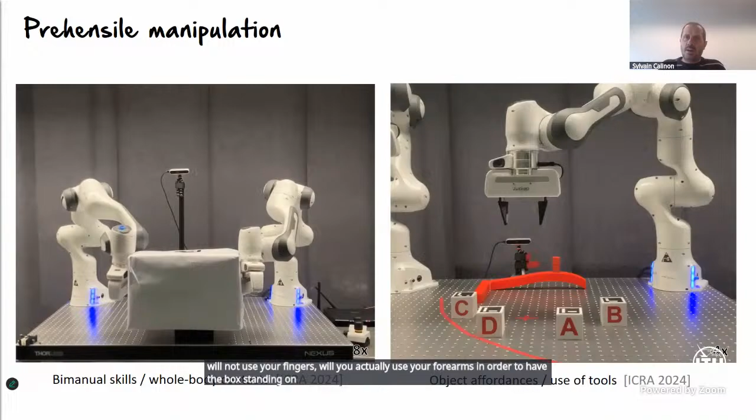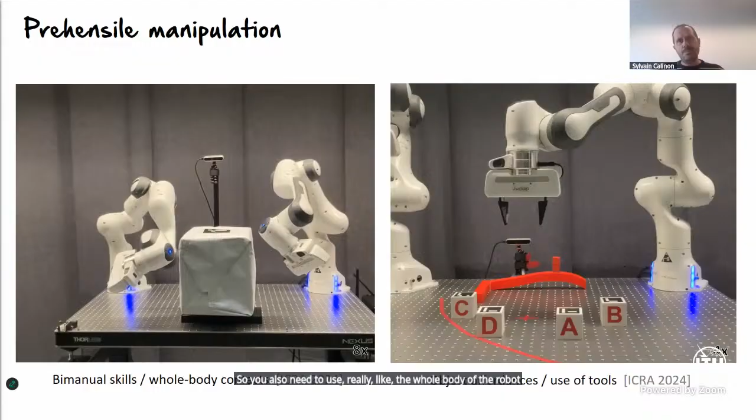It's very important for humanoid robots because you cannot put very complicated hands on them, they would be too heavy. So you also need to use the whole body of the robot if you want to provide manipulation capability to these new humanoid platforms.

So here we are studying this with bimanual tasks. We are using robots in our lab that are compliant, torque controlled robots. And here we test different ways of using the whole body as a geometric way of describing what kind of contact point we can use to solve the task.

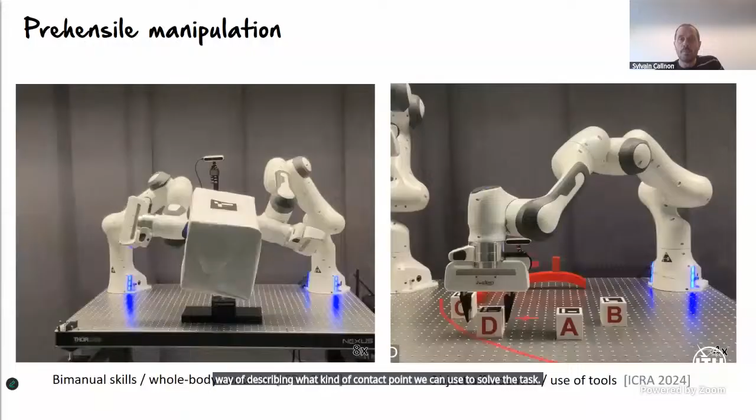Then we also study the problem of using tools. If we don't want to use the gripper, we can still use tools that the robot can grab. And in many applications you have a diversity of tools that you might want to use, and these tools can be used to simplify the work of the robot.

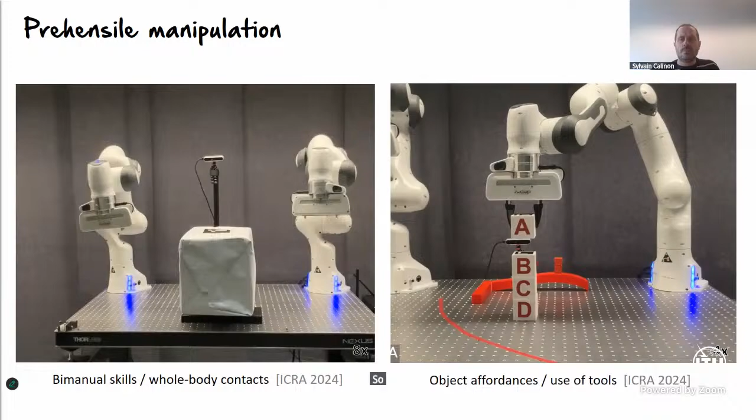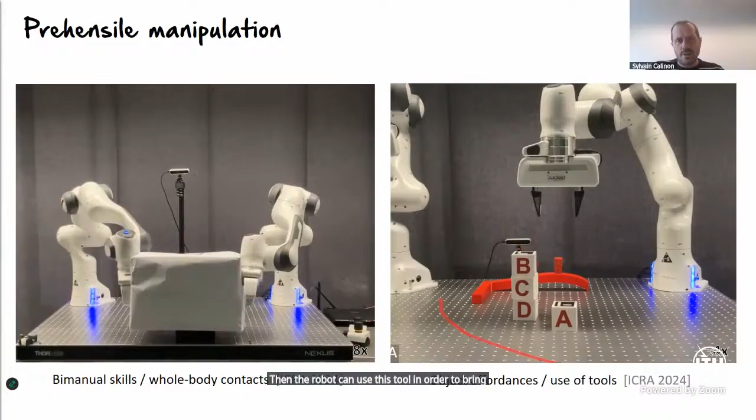So here in this example, I provide some kind of rake that the robot can use. And if the objects are too far away, then the robot can use this tool in order to bring them closer. So that's for prehensile manipulation.

But now we have also a lot of non-prehensile manipulation skills. These are all the skills involving pushing or pulling objects. And here these tasks are important. We do quite a lot of work by pushing and pulling objects on a table, typically.

Like if we have large boxes that we need to align, then it's likely that we will exploit the environment and we will not put the box directly where it needs to be. We will put it first closer to us and then we'll slide it, because it's much easier to do. We don't need to use too much energy to do this. So pushing, pulling is important for that.

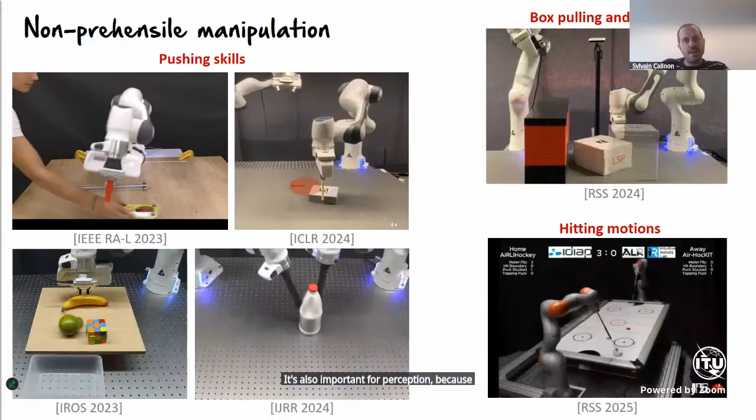It's also important for perception, because you can simplify the scene if you are separating objects that would be stacked somewhere. It's also simplifying the separation of objects in order to grasp them. If they are better separated, we can grasp them in an easier way. And it's also more generically useful to be able to reorient objects.

So if we now think of exploiting the environment, then we can also think of tasks such as pivoting objects using the environment in order to manipulate dexterously these objects.

Another example of non-prehensile manipulation is this Air-HocKIT challenge in which we participated. And here it's involving more hitting movement and also strategies about how to bounce the puck on the wall in order to win the game. So these are examples of non-prehensile manipulation skills.

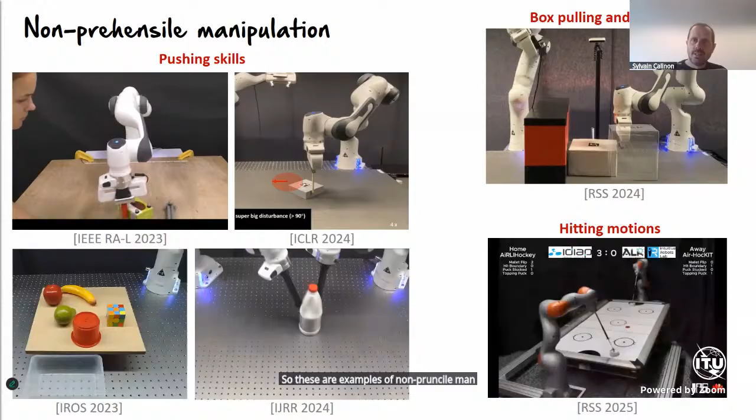Now we are also involved in projects focusing on very precise manipulation, typically with watch manufacturing and these different kinds of industries that require very precise movement to be done. And often we have platforms that are very expensive if we want this precision.

What we demonstrated in this task is that we don't necessarily need to use expensive robots. We can actually use cobots that are less precise and available more easily on the market, and instead use a wise way of correcting for the imprecision that these platforms have.

And this process requires some active perception, so that the system is correcting online by perceiving what are the offsets in what we want to do. It's typically what we do on our own, like if you try to do a task blindly, you might not do it correctly, but if you have the visual feedback, you will correct your movement.

And here we did the same with this platform, and we could demonstrate that with a wise way of sensing the environment, we could achieve this very precise task of using a needle head and a string, and then actually put the string in the needle head. Why? If we look at the data sheet of the robot, we are not supposed to do that, it goes beyond the precision of this robot. But if we have this local correction, we could achieve this.

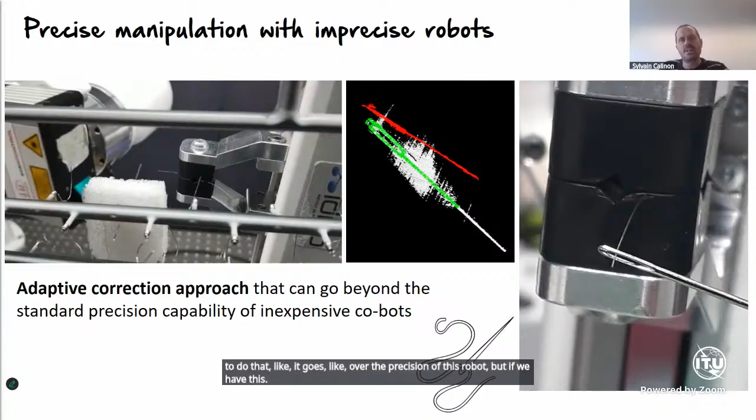Now let me give you a last example to show what we do in our lab. So that's the important point I would like to convey first.

We are also working on teleoperation. And teleoperation is, in my view, human-robot collaboration. We have the robot doing some part of the task, the user doing some other part of the task. So teleoperation is just distinct by the fact that the user is usually away from the robot.

What we did in this project was a large European project, and there was a teleoperation center. The idea was to teleoperate a robot to do some valve turning, very deep in water. We had this slow communication process because we cannot communicate with the robot in the middle of the ocean in an easy way from a teleoperation center.

So here we had to bring some form of intelligent correction for the robot to be able to handle situations locally. In this example, the robot was automatically correcting for perturbations by transferring only the higher level information.

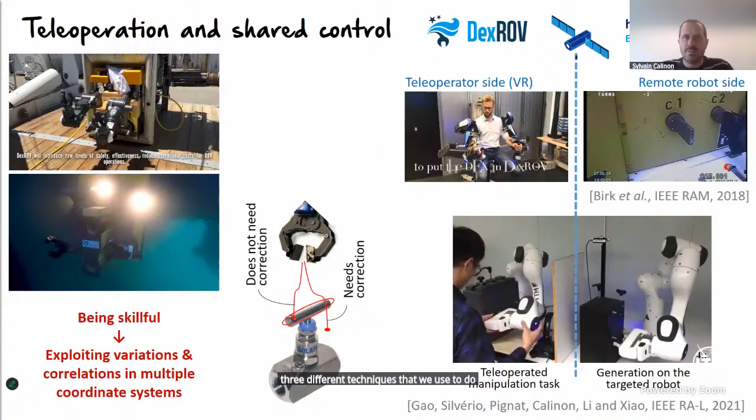Now in the rest of this presentation, I will show you 3 different techniques that we use to do these different kinds of manipulation tasks. It's some kind of highlight to give you ideas about what research components we have behind, and what kind of models we are considering. I will propose 3 different models.

One is called ergodic control. The other one is called tensor networks. And the final one will be related to geometry.

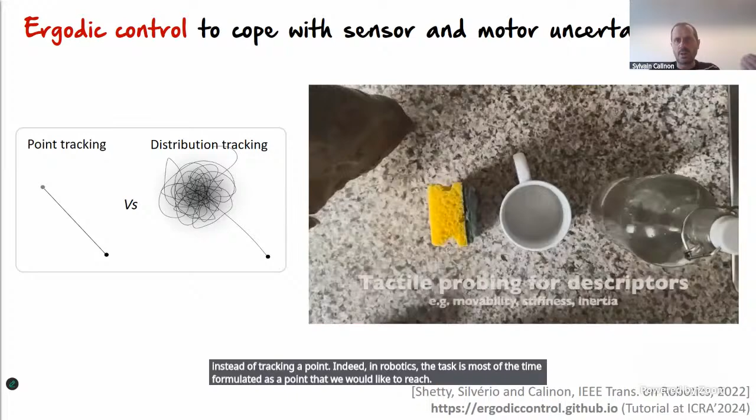So the first is about tracking a distribution instead of tracking a point. Indeed, in robotics, the task is most of the time formulated as a point that we would like to reach. Like we have a target, and we ask our robot to reach for this target.

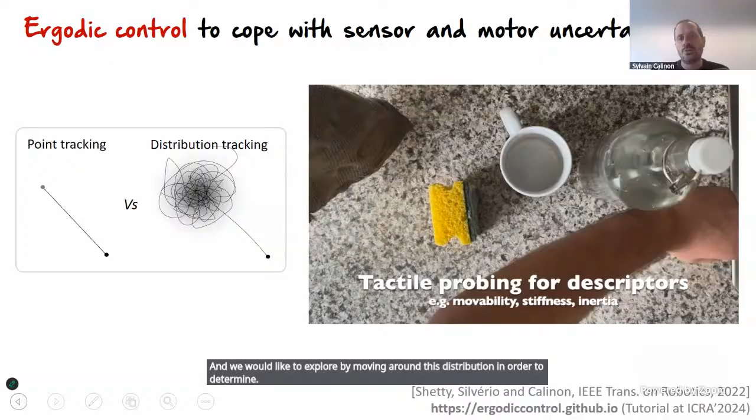Now, ergodic control instead is specifying the target as a full distribution, meaning there is an area that we would like to cover efficiently. So we would like to move within this area. Doing this means we would like to search for something that would be hidden or where we don't know the exact location. We would like to explore by moving around this distribution in order to determine where the objects are located, or where is the object we want to find.

Think of the example of finding our keys in a living room. My argument is that ergodic search is a much more natural way of searching for your keys in your living room. You have some kind of initial distribution that could be the usual locations where you drop your keys. It can also be flat surfaces, because it's easier to put keys on a flat surface. So you have some kind of distribution that is telling you, okay, these are the areas where I believe the keys could be.

The reason is that the ergodic search is specifying the problem from low resolution to high resolution. So it's like trying to solve the problem in a very blurry manner at the beginning, roughly scanning for the keys in the room. If you don't find the keys like that, you look at more details, and if still not found, you look at even more details, exploiting the different spectral bands.

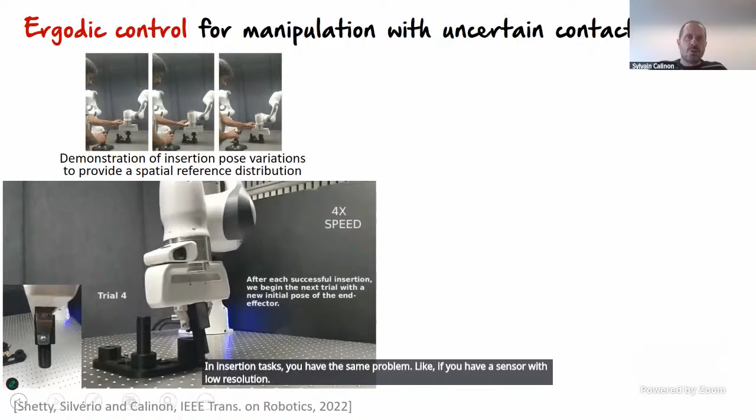So for robotics, we use that for insertion tasks. In insertion tasks, you have the same problem: if you have a sensor with low resolution, you will not know exactly where the entry point is that you would like to reach. So you can specify that as a distribution, but you don't know exactly where it is.

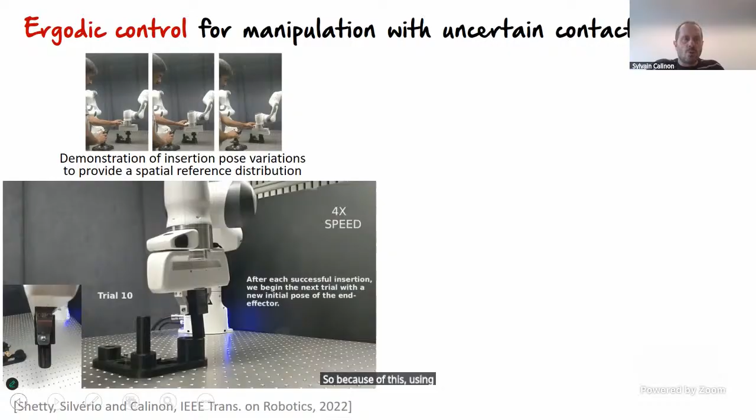Same thing with the gripper. The component you are holding in the gripper, you might not know exactly where it is. You might also have an inexpensive robot that maybe isn't precise enough to understand exactly where it is located in space. Because of this, using ergodic control will generate exploration behavior that allows the robot to fulfill this task, even if we don't know exactly where the point we'd like to reach is. That's the first example of application.

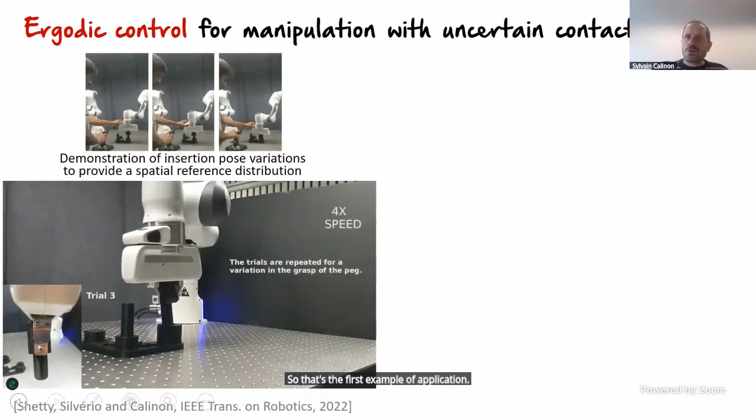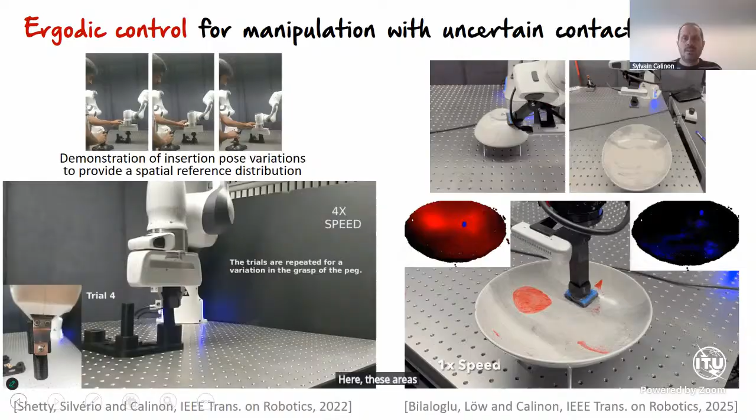Another example is to exploit this as a coverage problem. Initially it's formulated as a control problem where we would like to cover some areas. Here, these areas in this example are spots on dishes that we would like to wash. In this lab setup, it's not dishes being dirty with food, it's just a marker being used to play with the robot, and the goal of the robot is to erase these red marks that we are putting on the different kitchenware. So here it's also to demonstrate that this ergodic control problem is not only in a plane or in 3D, it can also be on a point cloud.

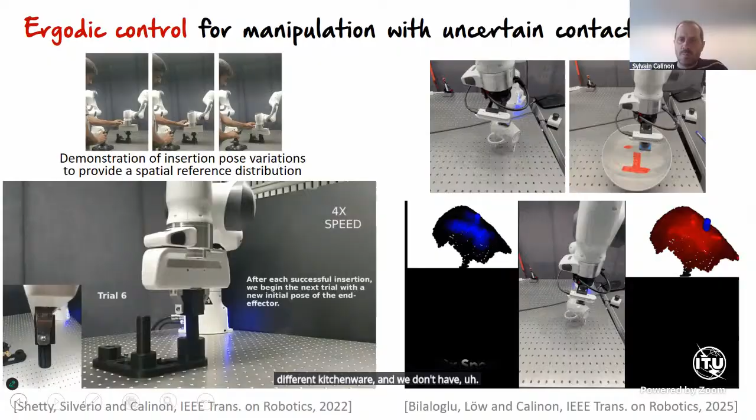And here in this task, we are also using vision to determine the shape of this different kitchenware. We don't have a prior model about this, and we have the robot being autonomous at washing these dishes. So that's the first example of a technique that we are using in our task.

Then the second one is what we call tensor networks. Of course, many of you are familiar with neural networks, and there are many different kinds of structures you can consider for neural networks. Tensor networks is a bit less known. It's known a lot in the field of physics.

It's also like a processing pipeline, trying to extract the essential information out of the data. But it's a technique that works much better if we have a small amount of data, which is the case when we're talking about learning from demonstration, where the user is directly showing the robot what to do. We often have much smaller datasets compared to machine learning tasks that involve images or text. So for us, tensor network is an important processing pipeline.

And there are really diverse structures that exist. In our work, we use a lot the tensor trains, which is one model among others. But there's a lot of literature in research trying to see what this structure can do for optimization problems, for reinforcement learning problems, or for supervised machine learning.

So to give you some idea about what it is, the goal is to model a reward function. A reward function tells you if the robot has succeeded or not in the task. And the decision variables will be either some environment variables that describe the scene, like the locations of objects in the environment, or some policy variables that are what the robot has to do.

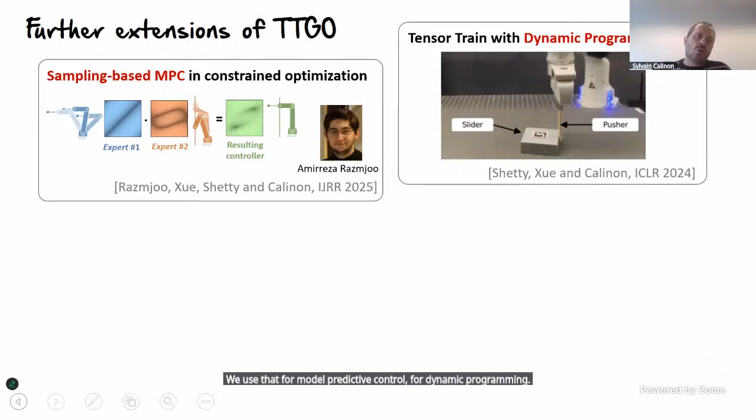So in our work, we have been extending this to various more elaborated problems, but here I wanted to give you a flavor of what this is. We use that for model predictive control, for dynamic programming, and also for learning problems involving Monte Carlo tree search. So all of these works are using the same core processing pipeline of tensor networks.

And this brings me to the last part of my presentation, which will be about discussing the role of geometry as inductive bias to a learning problem. And here I will show different ways of treating geometry. So the first way is to use what is called geometric algebra.

Geometric algebra is an approach that is allowing us to treat points in the same way as full coordinate systems, as rigid body motion, but also planes, lines, spheres, and circles. So we have these basic geometric shapes.

And the advantage of using geometric algebra is that when we write a function, so when we make some computer code, which can be, for example, interpolating between two objects - like if I have a point and I would like to reach another point, then I can write an interpolation function that will give me the list of intermediary points to move from one point to another.

With geometric algebra, what is nice is we can write this function and then change the object. So we can then call this function with other objects. So I can call the function with two lines, and I will have a smooth interpolation between two lines.

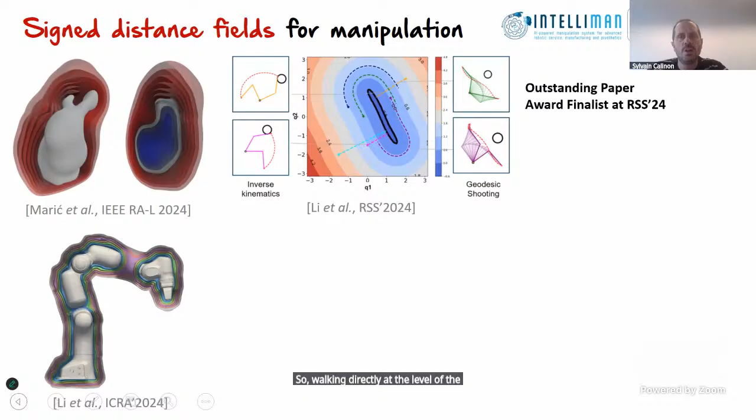It can also be used as a way to represent trajectories in an implicit manner. The idea is that we start from a trajectory, which can be a demonstrated trajectory or one found by an optimal control technique. We transform this trajectory into a distance field, and we use the derivatives of this distance field to generate a policy telling the robot what to do when faced with perturbation. With a flow field like this, if you move the robot away, it will know what to do because it's generating an autonomous system.

There are many other ways of exploiting these implicit models representing trajectories, and we are currently investigating what it means to do that in latent spaces, using neural networks to find a latent space, having trajectories in this latent space converted into an autonomous system. We demonstrated that we could beat several benchmarks by treating the problem as trajectories instead of policies.

So that's one of the possible aspects of thinking of objects as implicit distance functions. But we can go one step further. This is what is being investigated in this work, where the goal was to extend the notion of distance to a full coordinate system that would move along the surface of an object. The basic idea is: you take an initial coordinate system and slide it along the shape of your object, then slide it through the whole volume surrounding the object. If this change is smooth enough, it generates a local coordinate system that is very meaningful for manipulation tasks, describing the problem in a very intuitive way.

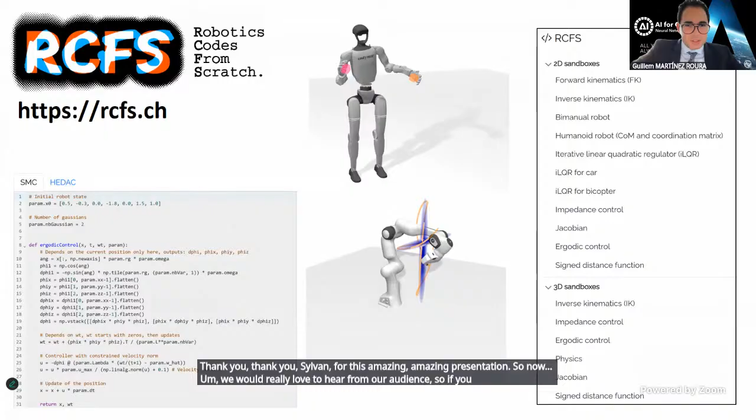And if you agree, for the Q&A, I will just run this video. I will not talk about it, but I will run the video to entertain people while answering questions. Okay, yes, please, that's great.

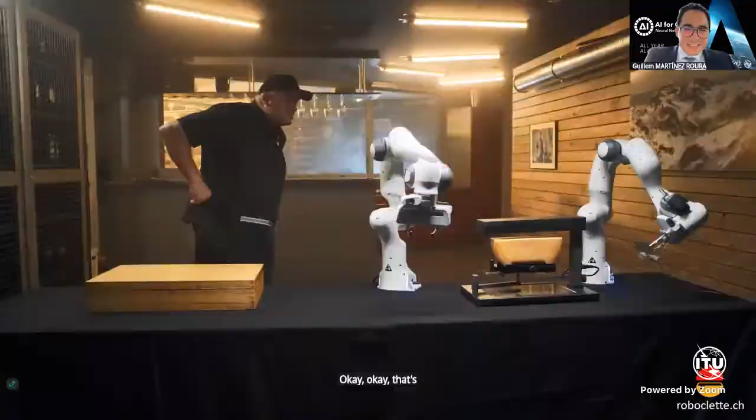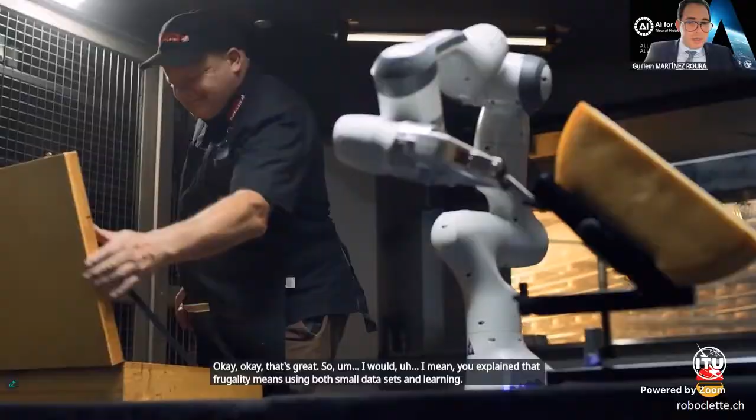You explained that frugality means using both small datasets and learning only what truly needs to be learned. I would like to ask you how you decide which parts of a manipulation task should rely on prior models and which should be left to data-driven refinement.

Thank you very much for the question. It's an important question, and it's quite hard to answer. Often, first, we have problems that are sometimes wrongly formulated.

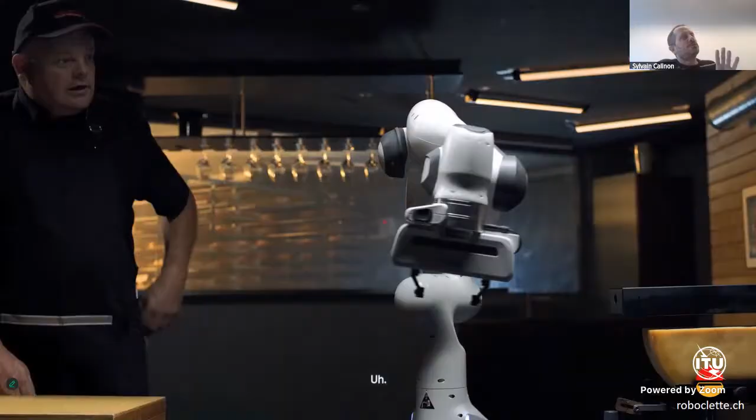For example, if we already know how to solve a problem, then we don't want to learn it, even if it could be an exercise to see if our system could learn something we already know. We could do it, but it's not useful. So I would advocate to really try to see in robotics what we can do without learning, and at some point we will need learning, but not try to reverse engineer something that we already know.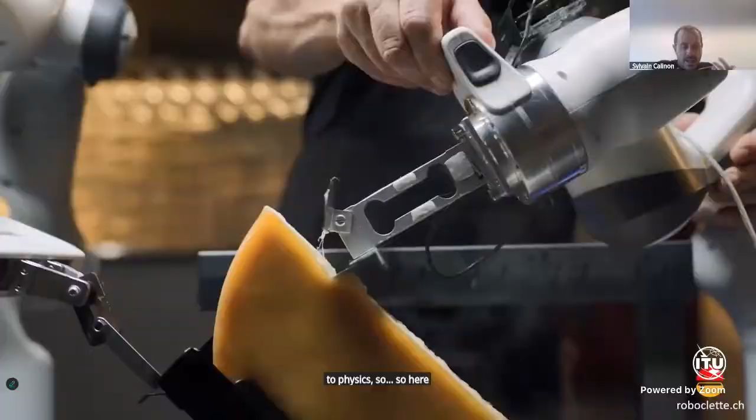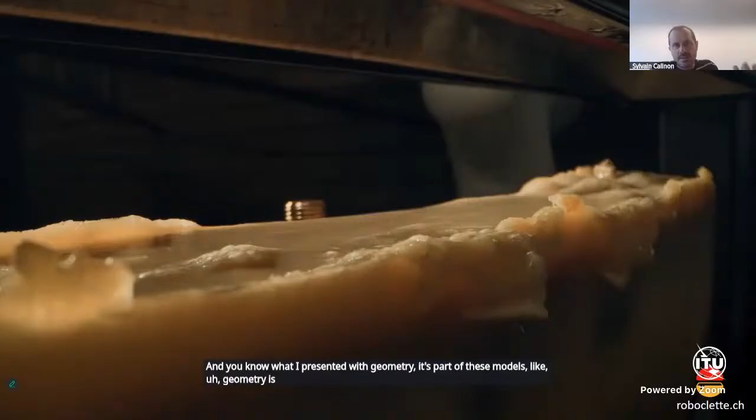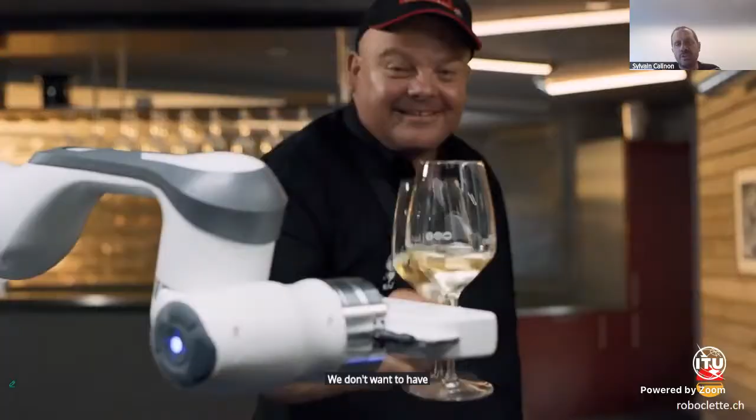Sometimes what we already know is related to physics. So here I'm encouraging use of physics-informed neural networks. What I presented with geometry is part of these models, since geometry is part of physics, in the sense that if we have some geometric knowledge, it's better to use it. Same for physics more broadly. If we know about gravity, we don't want the robot learning about gravity. So we need to be careful about what needs to be learned, and care about the amount of data we need to do this.

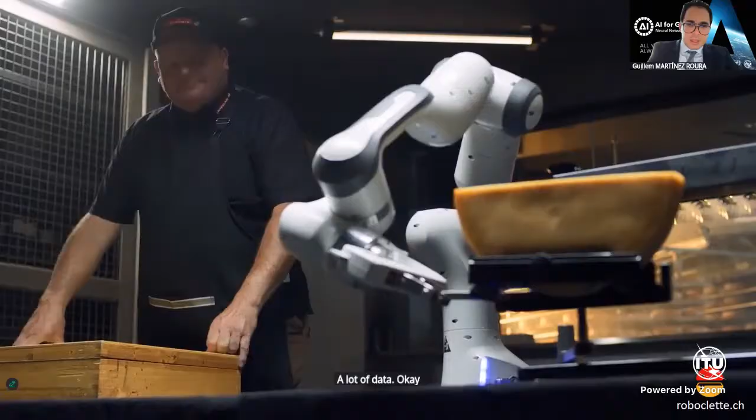I mean, you use the scaffolding metaphor. So how do you see this approach as scaling when multiple users with different teaching styles interact with the robot?

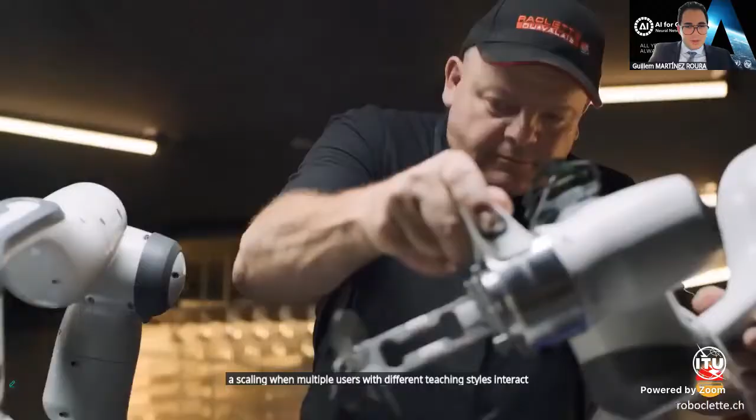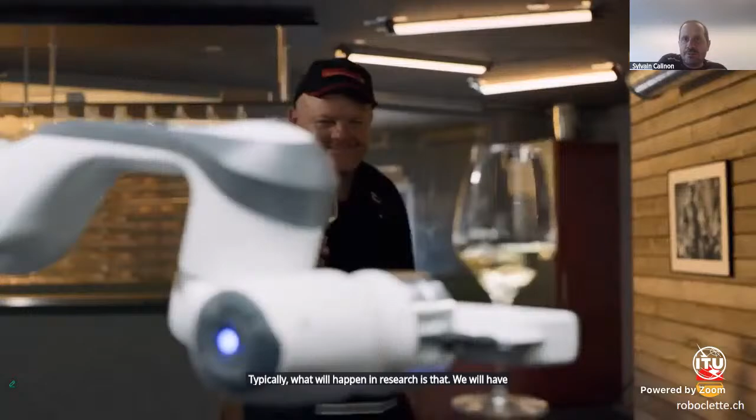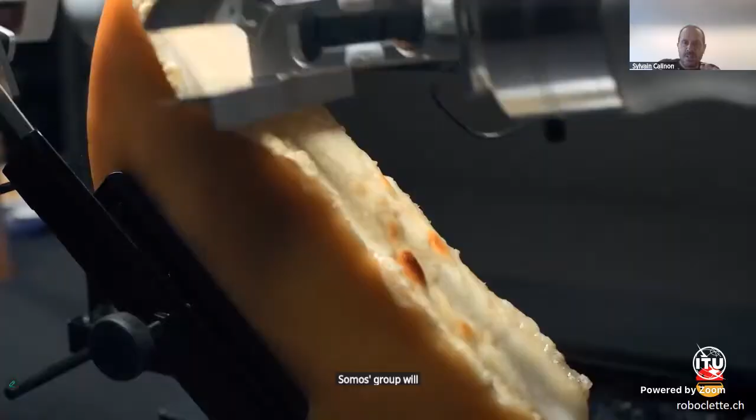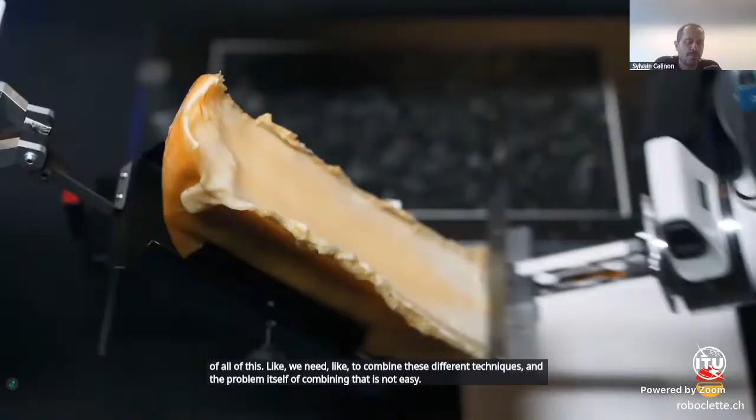That's another excellent question. Here we don't really have a solution. We are aware that we don't use these different learning strategies as efficiently as we could. Typically in research, one group specializes in reinforcement learning only, another in learning from demonstration only, another considers only high-level symbolic learning, and another sees learning as very low-level, like policies and controllers. In reality, we need a mix of all of this, we need to combine these different techniques. The problem of combining them is not easy, because some techniques involve the user and some don't. If you want to take all these factors into account, it's another kind of meta-learning problem, where we need to consider what the robot needs, what the user needs, how often the task is changing, how often the environment is changing. There are a lot of aspects to consider. I was trying to promote techniques that would mimic the way we learn and acquire skills. Since we use multiple learning strategies, I guess our robots could also use multiple learning strategies.

Sorry, I was muted. So we have some questions from the audience. One of them is how memory works for continuous learning. Are there any breakthroughs in memory recall that are exciting for your team?

Yes, definitely. We worked on a European project called Memory of Motion, a large project with many partners. The research topic was exactly about understanding and making models to understand better how to efficiently use memory. In this case, it was a memory of motion, because currently we have too many things being thrown away. The robot learns something and then we throw away this knowledge, and it happens too frequently that we throw away something we already know and learn it again, because we've changed too many things, maybe the models, maybe the task involves various elements that don't allow us to reuse what the robot already knows. So in this project, we tried to see how to build a memory that is compact enough so the robot doesn't need to forget what it knows, but can reuse efficiently what's stored in this memory. It's really a compressed model, not storing as we store files—it's not just about compressing files, it's more elaborate, also using prior knowledge about movement, physics, and different geometric aspects that we can put into the system.